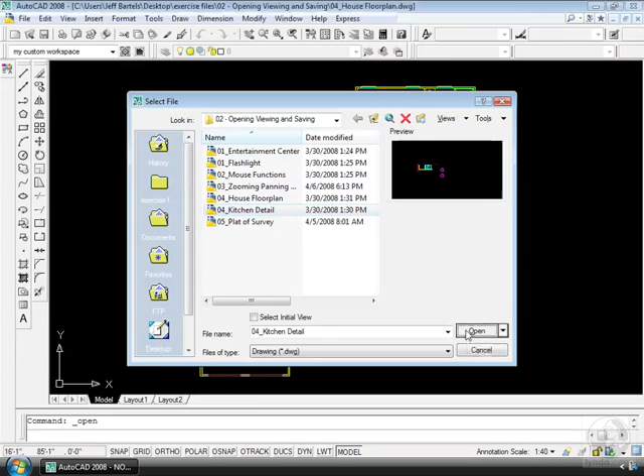Now I've currently got my drawing of my house floor plan on my screen, and I'm going to go and open a second file. I'm going to do that by coming up to my Open icon and clicking, and this will bring up my Select File dialog. Let's highlight the kitchen detail drawing and click Open. Notice the kitchen detail drawing is what we see on our screen.

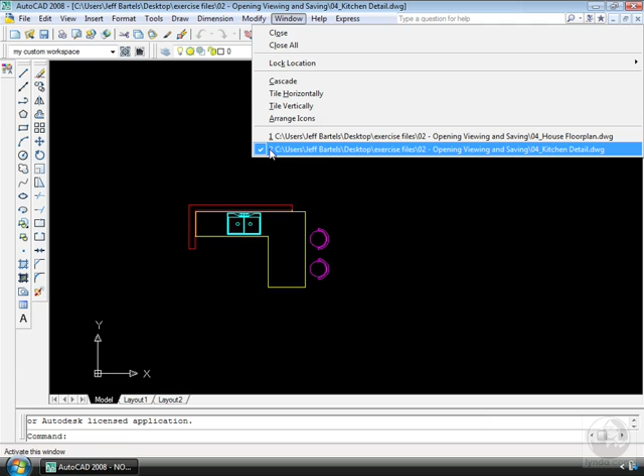Now you may be wondering, where did that first drawing go? I do have two drawings open. Let's go to our Window pull-down and find out where the first drawing went. I'm going to come up to Window, and I'm going to come down to the bottom of the menu, and at the bottom I can see a listing of all of the drawings that I have open in AutoCAD. The one with the check next to it represents the drawing that is currently visible on my screen. If I click on the number 1 option, I will flip back to my floor plan.

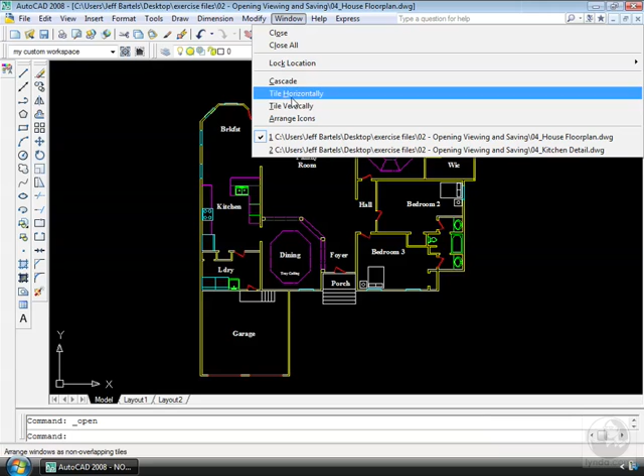One of the nice aspects of being able to work on multiple drawings at the same time is that I can create side-by-side comparisons, or I can move geometry from one file into another. Let me show you what I mean. If I come up to the Window pull-down, I can come down to this area of the menu, and I can select Tile Horizontally or Tile Vertically. This will allow me to see all of my open drawings, and it just depends on which orientation I like. I'm going to select Tile Vertically. This gives me a side-by-side comparison of the two drawings.

And since I have two drawings open on my screen, I can work in either drawing just by clicking in the window. For instance, I just clicked in the window on the right. If I hold my pan button down, I am now working in this drawing. If I move my cursor over to the left and click, I can now hold my wheel down. I can pan or work in this drawing. If I had an instance where I had two versions of a drawing, I can open up each one in its own window, and I can make comparisons between the two.

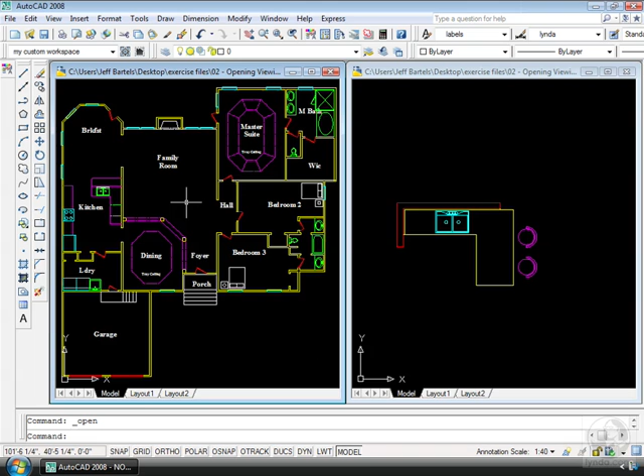Now in this case, I have an instance where I'd like to move geometry from one file to another. In the floor plan on the left, I've gotten to the point where I'm adding furniture, and I'm going to zoom in on the kitchen. In my kitchen area, I've got a large countertop, and I'd like to add some stools. This is going to be an eating area. And I happen to remember in a drawing that I worked on a couple of months ago, I had a similar situation where I created some stools. Rather than reinventing the wheel and creating those stools in this drawing, I'm going to steal the geometry from another file. I'm going to steal it from this file.

I'm going to come over and click in this window to make this window active, and I'm going to zoom in on my stools. If I'd like to move geometry from one drawing to another, I'm going to move my cursor on top of a piece of my geometry and left click. This will highlight it. Then I will left click and hold on a portion of the highlighted geometry. Do not do it on top of the blue square. So I'm going to left click and hold on a highlighted portion, and I can drag this into the current file. When I release, this geometry has just become part of my current drawing.

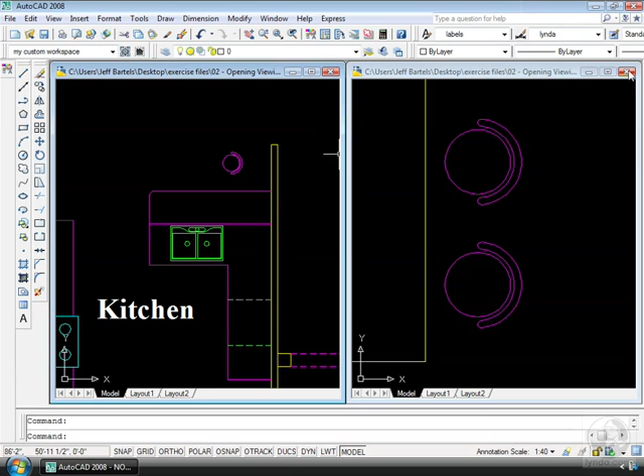Now I don't need my detail drawing anymore, so I'm going to come up and click the X to close that window, and I do not want to save changes. And now I'd like to maximize this window on my screen, so I'm going to come up and click the middle icon, which represents maximize, and this drawing is now full screen.

By allowing us to have more than one drawing open at a time, AutoCAD gives us quick access to our data and allows us to easily move our designs from one file to another.